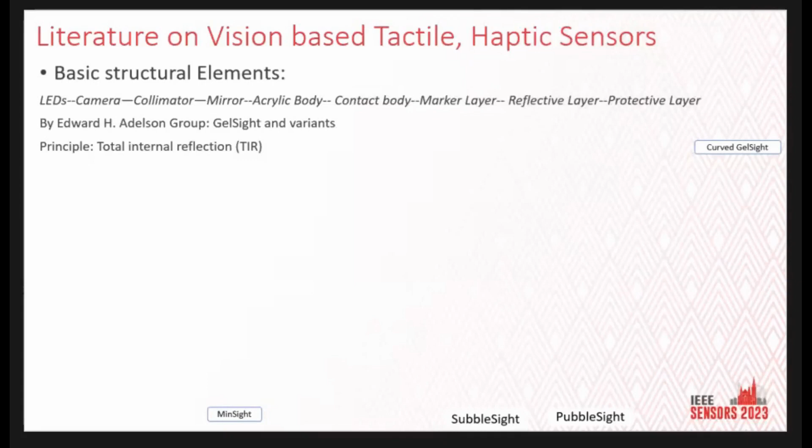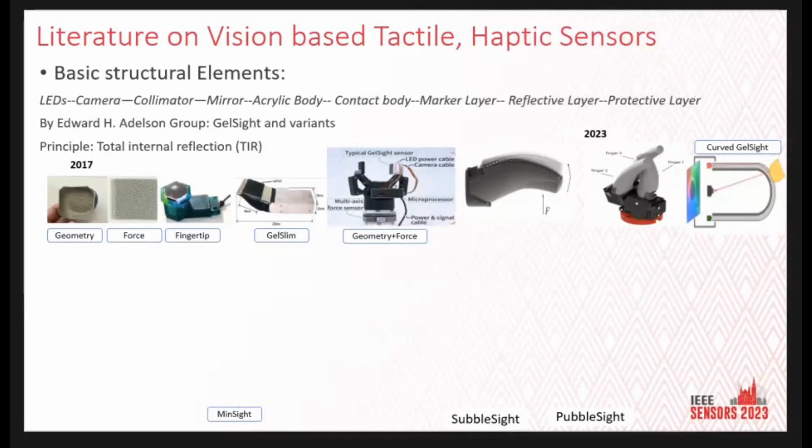through the medium. And these are some literatures which have been done from 2017 to 2023 by the Adelson group. So these are called GelSight and its variants. Similar work is done by Katherine's group, which basically changes the intensity of the light when you apply the force on the elastomer. So this is the elastomer, and here if you apply any force, the intensity of the light will change, which can be captured by the camera.

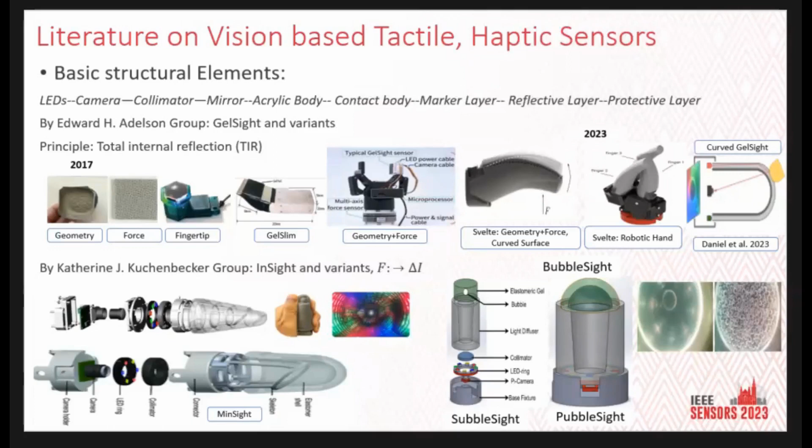So currently we have developed this one, which is called SubbleSight, which incorporates a single bubble inside an elastomer. Now it can enable 3D sensing. If you apply forces radially, or compressive or shear force, this can sense the deformations. And another thing the bubbles do is that because they weaken the material, it can sense lower forces. And you can similarly include a number of bubbles, then that will be called BubbleSight, and it can be curved also. So this is the configuration that we are talking about.

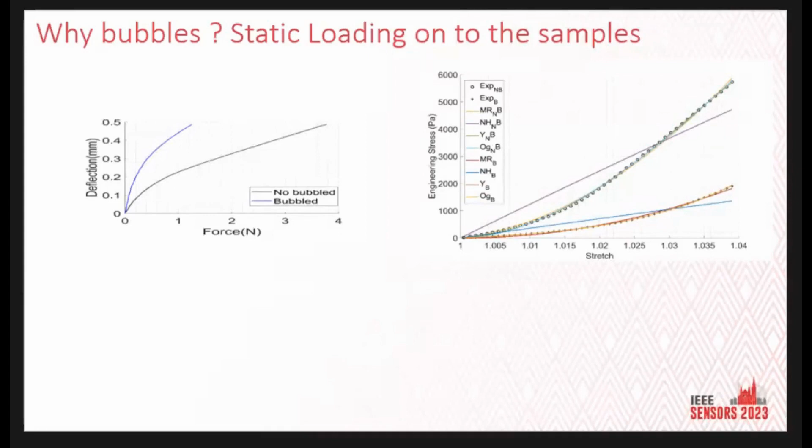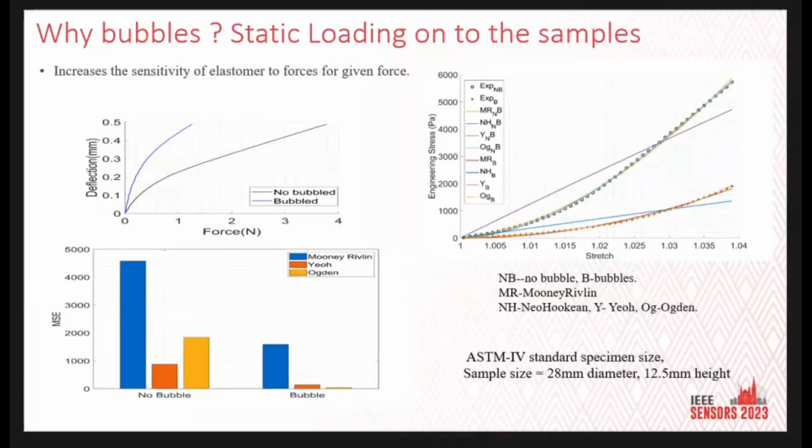And now basically why bubbles? If you do a force deflection curve with and without bubbles, you can see here for a small value of force, the deformation is higher, and we have put here different hyperelastic models, basically Neo-Hookean, Mooney-Rivlin and Ogden models, to match the characteristic, and the modulus coefficients we found from the optimization. So if you see the error from the experimental value, the Yeoh models are performing better. So we will take these coefficients for our further analysis.

Now, similarly, coming to the cyclic loading, it is observed that with bubbles it has lesser hysteresis, because the pressure inside the bubble helps the material to come back. So that also is observed in this kind of cyclic loading.

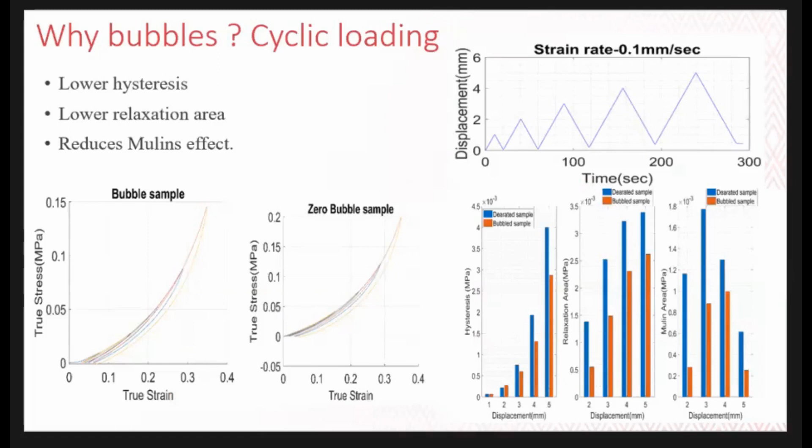So the algorithm can be anything. We can follow the contour change of the bubble or the optical flow when you apply the force. So the displacement vector from the optical flow can be a measurement of the applied force. Now this is the calibration and simulation setup where we are indenting the single bubble. So this is the bubble, and this is the indenter. Similarly, the simulation model is shown, and the parameters of the hyperelastic model are taken from the optimization that we previously discussed.

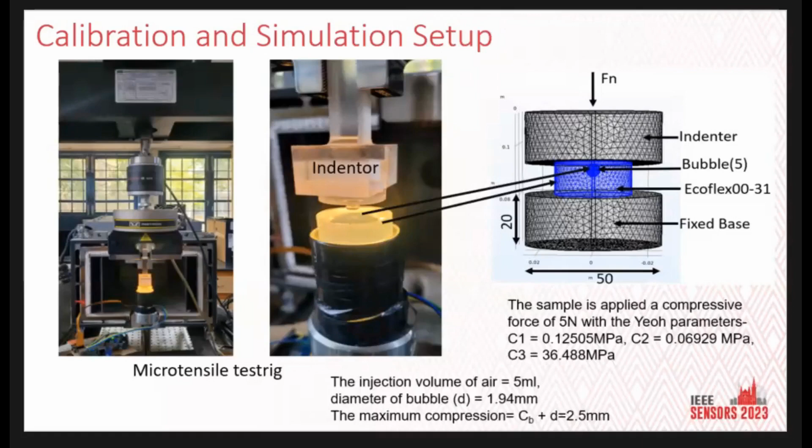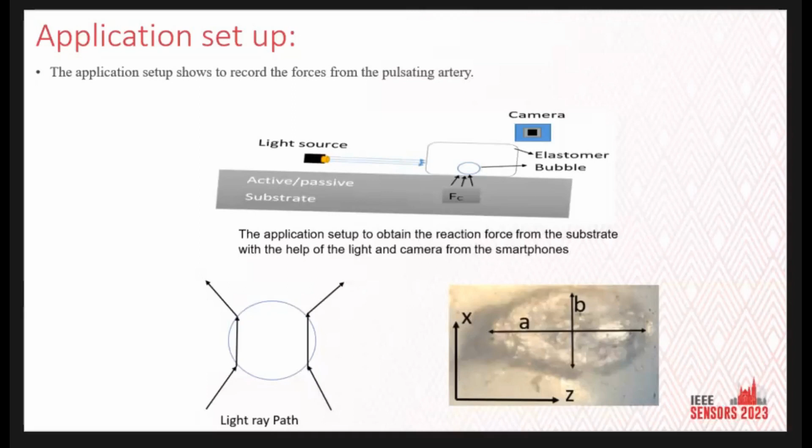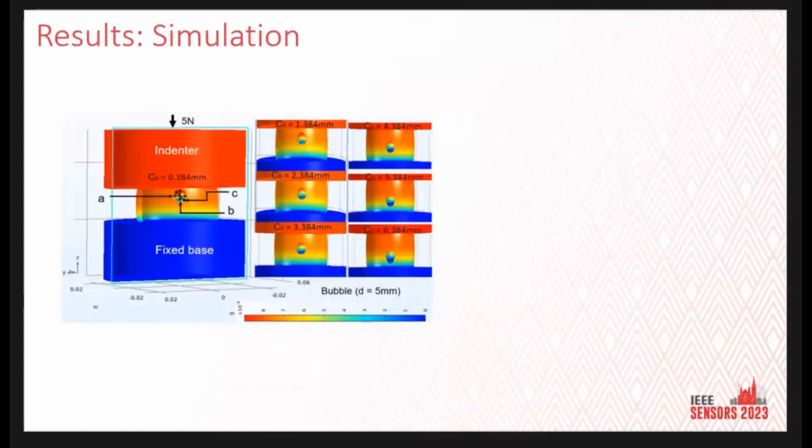So in simulation, we are trying to see the depth: if you place the bubble at different depths, how the response is. So the perimeter change is shown in this figure, when you apply force from 0 to 5 Newton with the different clearance of the bubble from the surface,

how the range behaves. Now when the bubble is placed at a greater depth, then you need to apply more force to sense the deformation. So it basically increases the range with the depth. If it is at the surface, it can sense very low force.

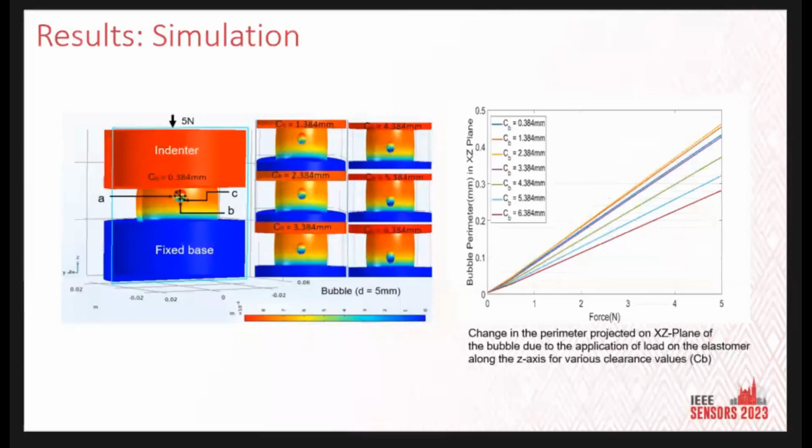Now coming to the calibration results, we have given this step input at steps of 0.5 mm displacements of the indenter, because you can control the displacement very accurately, and the force response is shown over here. So you can see it's a kind of a second order response, and the hysteresis also is shown here for different displacement of the indenter.

Coming to this, when you see the deformation as input and the force as output, and you do the system analysis, you can see at higher indentation the system behaves like a low pass filter, so it behaves like a first order system response. But for other depths, it is having a second order response, and slowly the corner frequency is shifting towards left

with the depth. So it shows that the low frequencies are more identifiable than the high frequency over here. So the bubble at the surface can be a very good application for getting the high frequency information than at a higher depth.

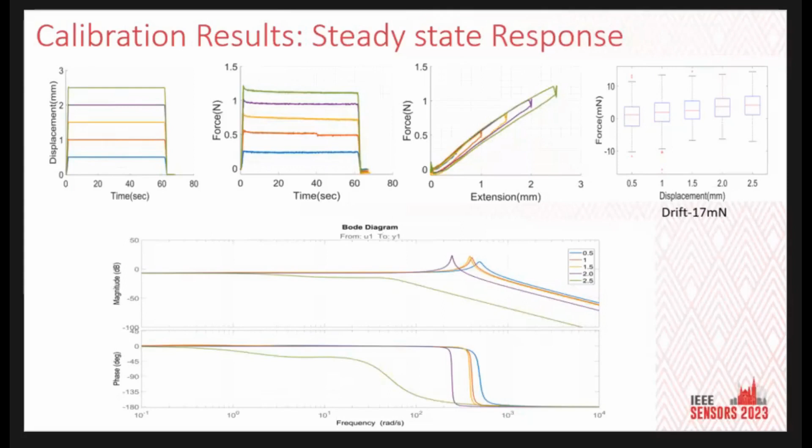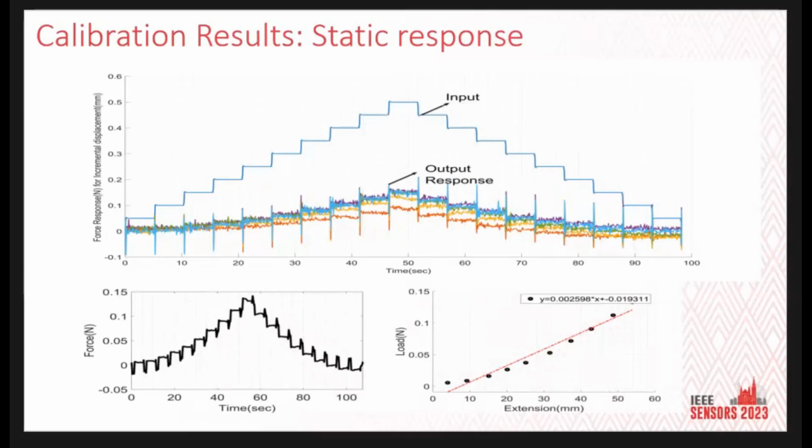So in the static response, we are deforming the gel from 0 to 0.5 Newton in steps of 0.05 Newton. So the output response of the force you can see over here, which is repeatedly done for 4 to 5 times, and the aggregate result is plotted here. So with the increase of the force, you can fit a linear curve to get its sensitivity, which is around 25 millinewton of resolution, and the sensitivity comes around 20 millinewton.

So this is a kind of application when you place it on the radial artery; you can see the video there. So it's kind of an analog twin of your heartbeat, which is transformed into the bubble motion. And if you take the Fourier transform of the displacement vector from the optical flow, it comes around 1.3, which is pretty much the heart rate.

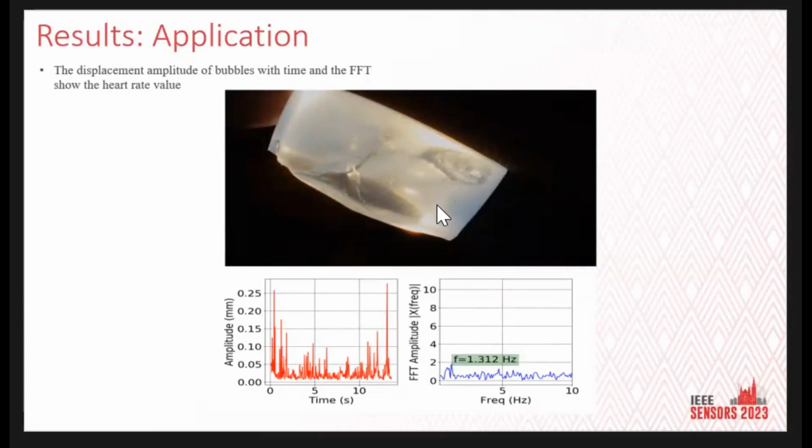And coming to the load applications, if you apply a normal load, it is going to deform like this. So I'm just applying through my fingertip, and this for the radial load, and this for the shearing. The calibration is only done for the compressive load alone.

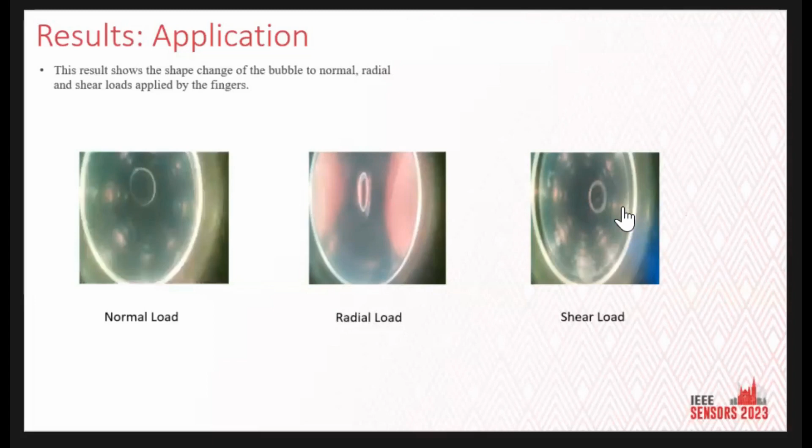So in conclusion, what you can say is that as the depth of the indentation goes beyond 2 mm, the bubble behaves as a first order response, as we observed from the simulation, and at lower depth of indentation the high frequency components are evident, and vice versa, from the Bode plot.

The sensitivity we observed is 20 millinewton, the resolution is around 25 millinewton, the drift is around 17 millinewton, and the range can go maximum 2.5 Newton, after which it kind of saturates. This is done for the bubble size of 1.94 mm.

And if you have a good camera with higher resolution, then it can also sense force in the order of 5 millinewtons or so. And with the depth, the sensitivity decreases, and the range can be maximized with the depth. So the future work includes mapping these changes with respect to the contour of the bubble, and how the gel behaves when you have plural bubbles in the matrix.